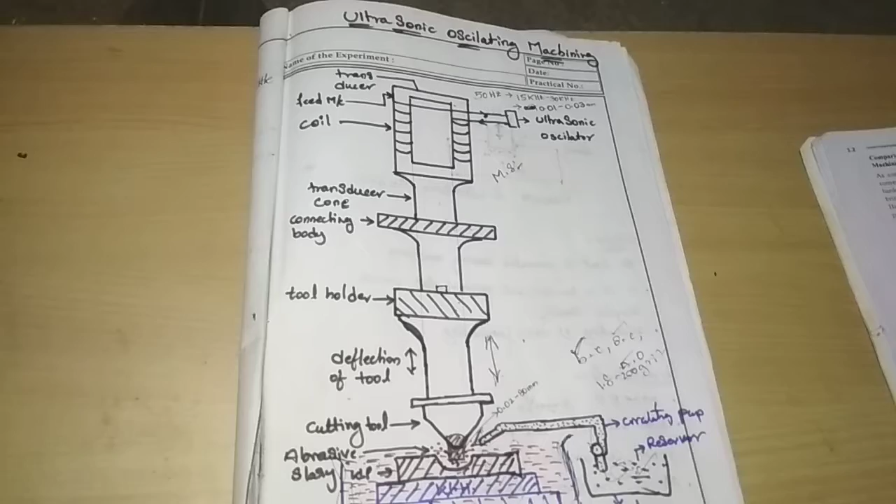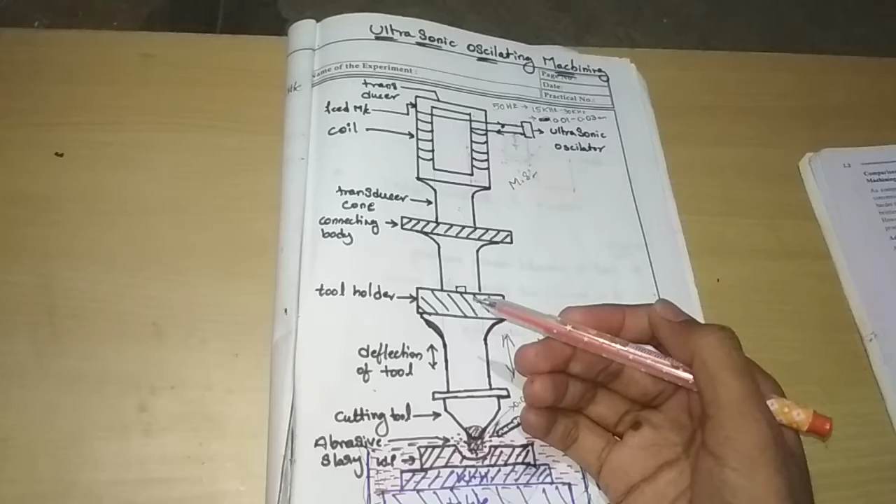Today we are discussing ultrasonic machining. Earlier class we already discussed about abrasive jet machining. So today, ultrasonic machining. This is the basic diagram of ultrasonic machine. We will explain each and every step in detail.

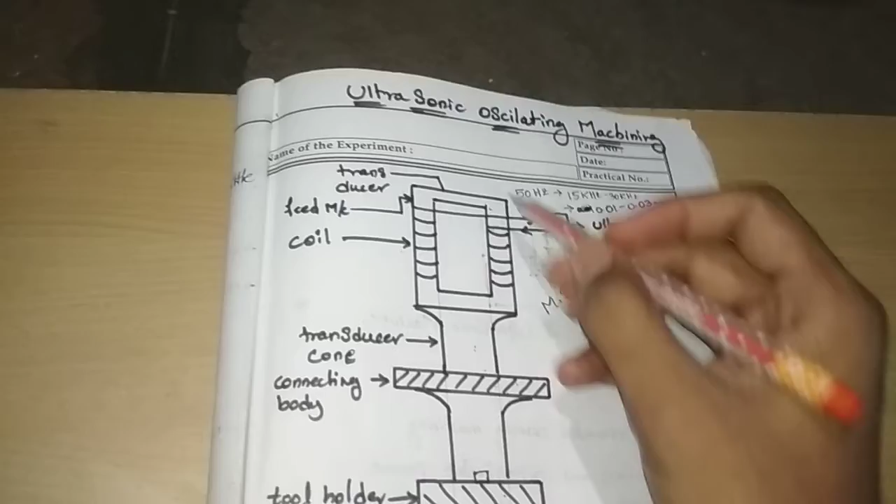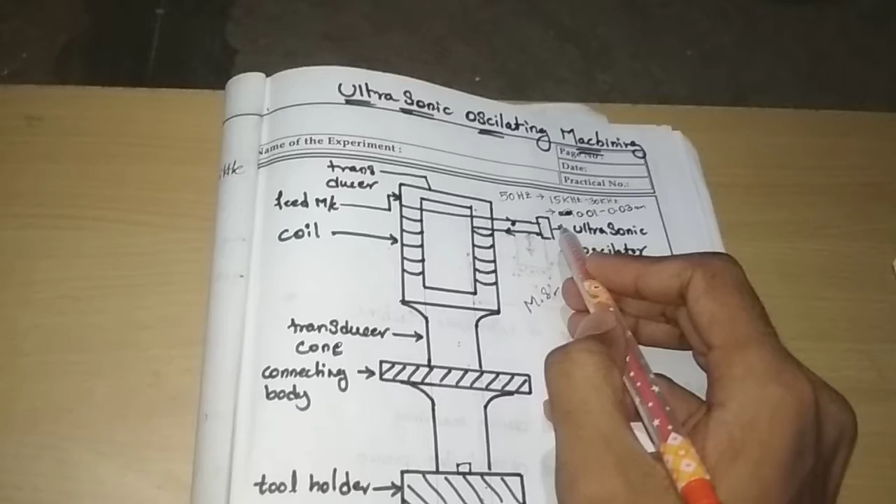Let's start. This is a transducer, this one is coil, this ultrasonic oscillator. So the transducer aims to convert linear vibration at high frequency with minimum amplitude. Low frequency 50 Hz power is converted to 15 kHz to 30 kHz, with minimum amplitude of 0.01 to 0.03 mm.

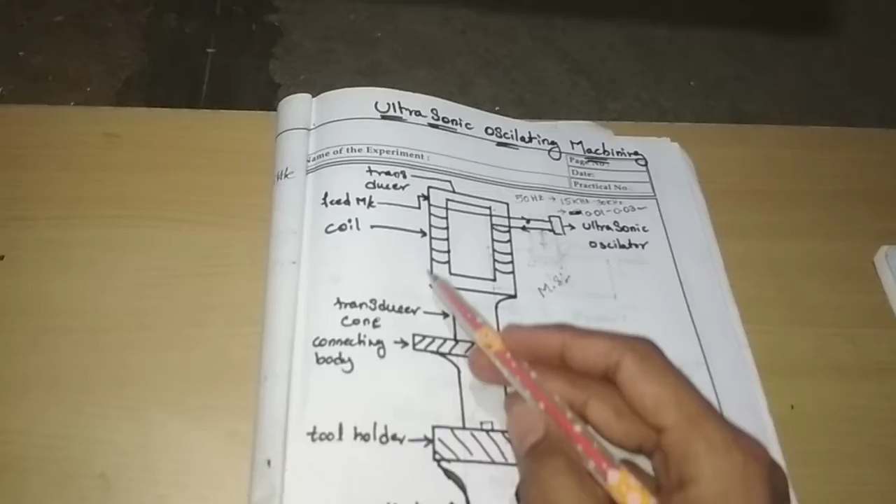This is a transducer cone, connecting body, tool holder and deflection of tool. Deflection of tool means the direction of tool moving, which means to and fro motion, up and down motion. So this is the up and down motion of the tool.

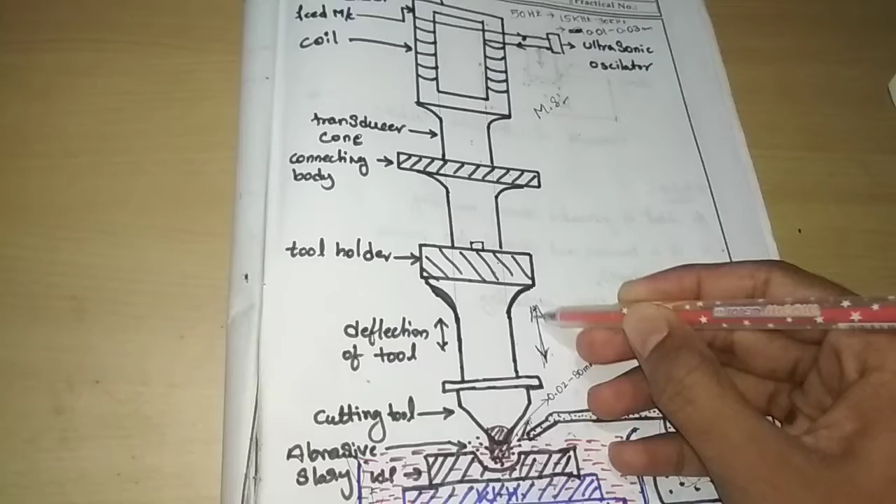This is the working zone: workpiece, work holding and table. This is a slurry containing abrasive particles. What is an abrasive particle?

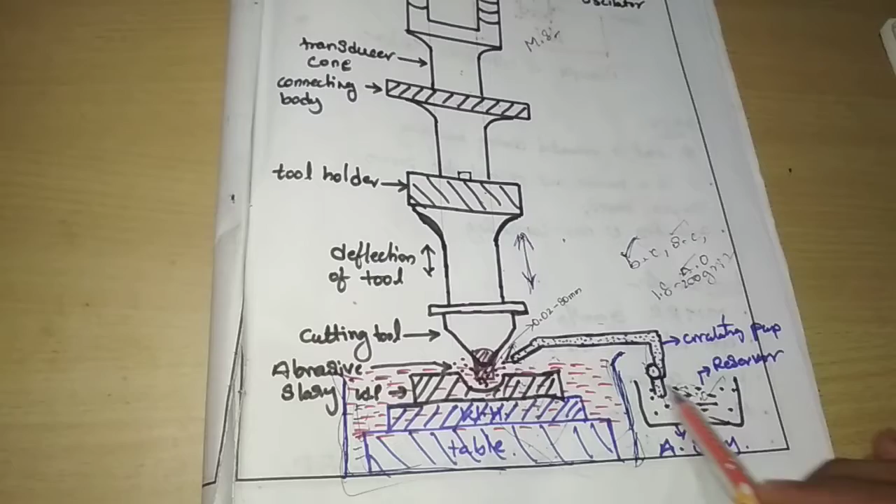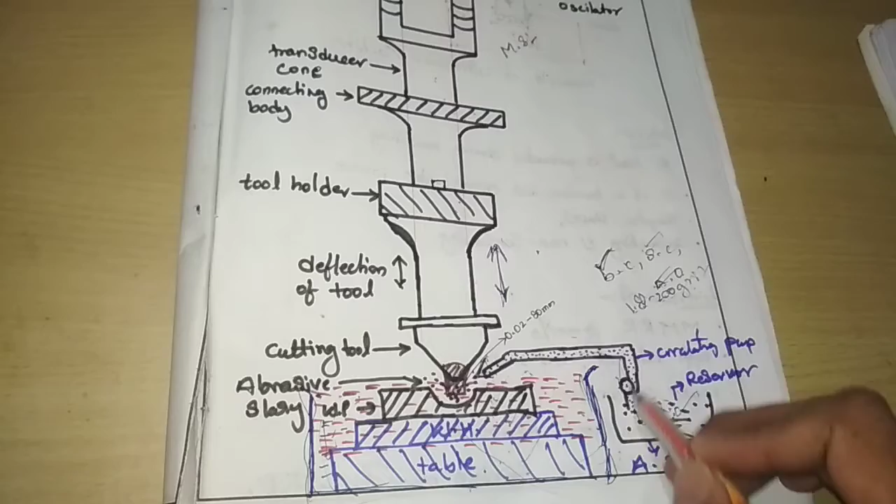Abrasive particle is a tiny particle which is very hard. Generally we use boron carbide, silicon carbide, aluminum oxide. The size of the abrasive particle is 180 grit to 200 grit. This is circulated through the pump. The diameter of the tool is 0.02 to 80 mm.

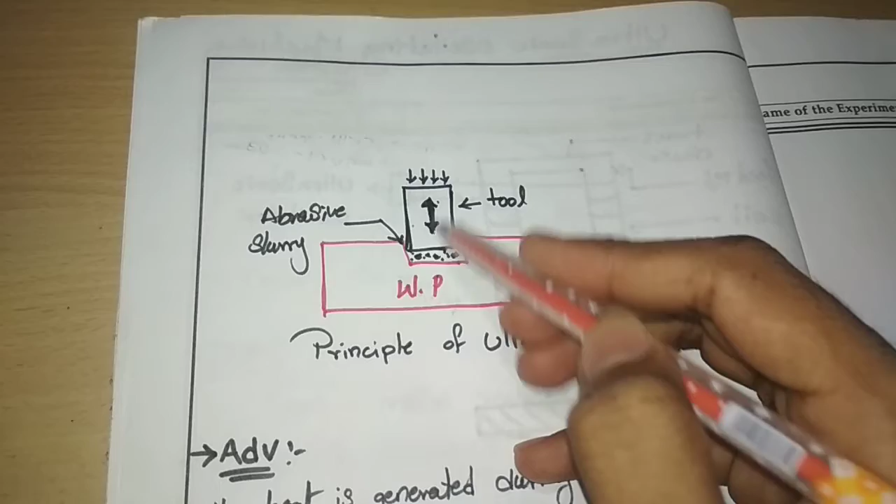The principle of ultrasonic machine, how does it work? This is a workpiece and this is a tool. The tool moves in up and down motion. The transducer generates high frequency with minimum amplitude and it will move up and down.

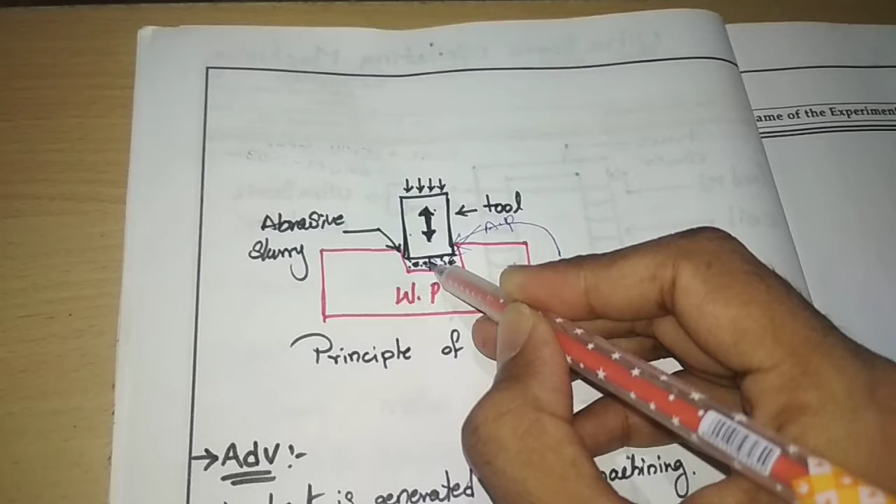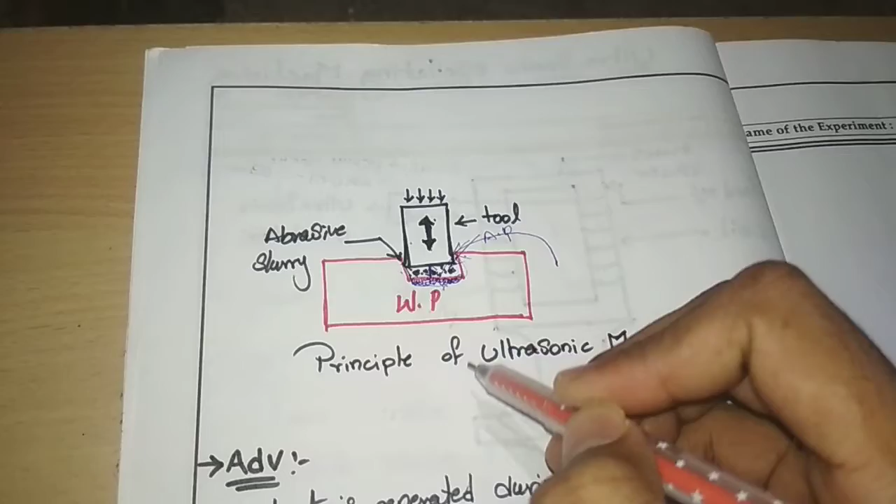So this up and down motion, we have a specific gap between the tool and workpiece. This gap is filled with abrasive particles, which are continuously circulated by the pump. These abrasive particles impinge the workpiece and remove the metal in the form of very tiny particles, very tiny chips. These chips are removed from the workpiece and make a die cavity, like a cavity shape we have formed.

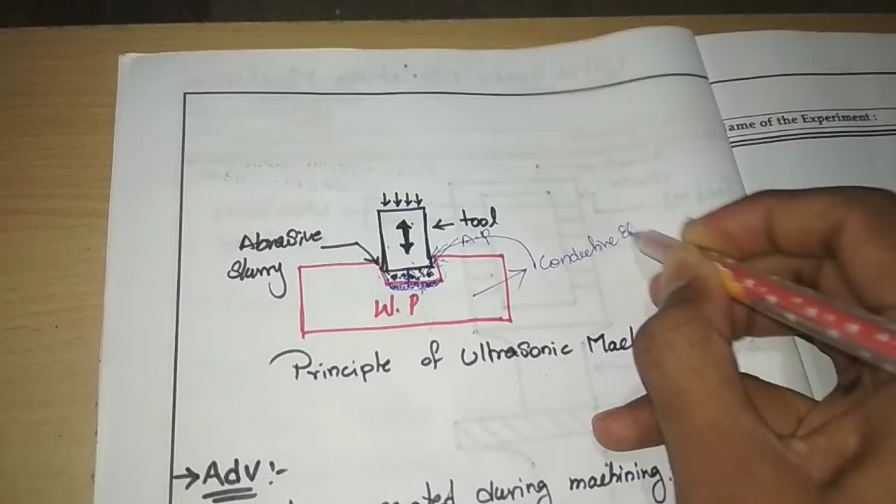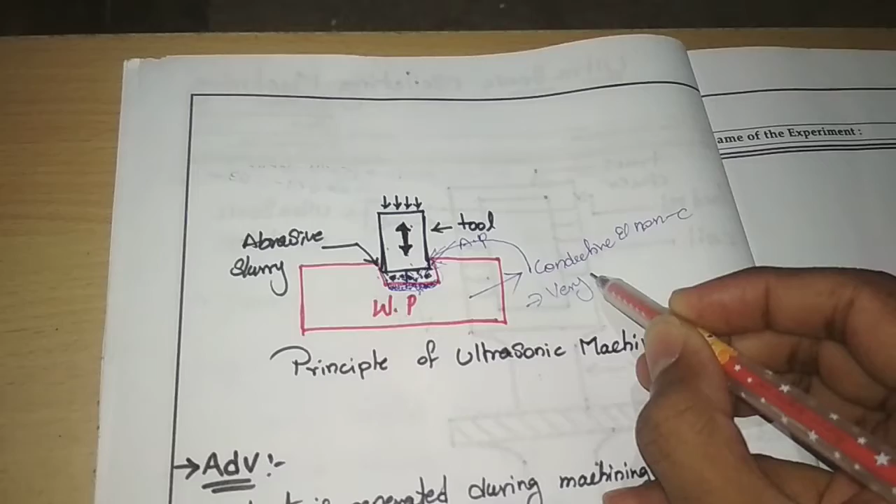So the main aim of the ultrasonic machine is to machine conductive and non-conductive materials, and it can also machine very hard materials. The motion of the tool is always up and down, so it will remove the metal in the form of very tiny particles. This is the procedure.

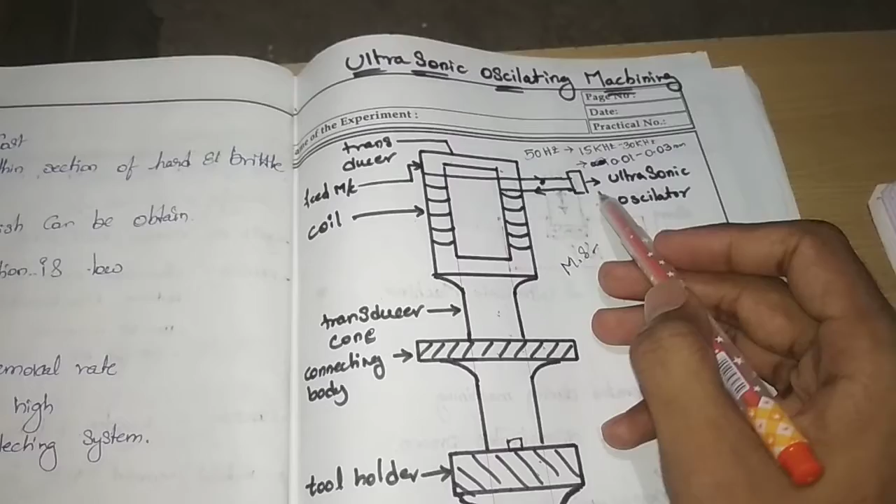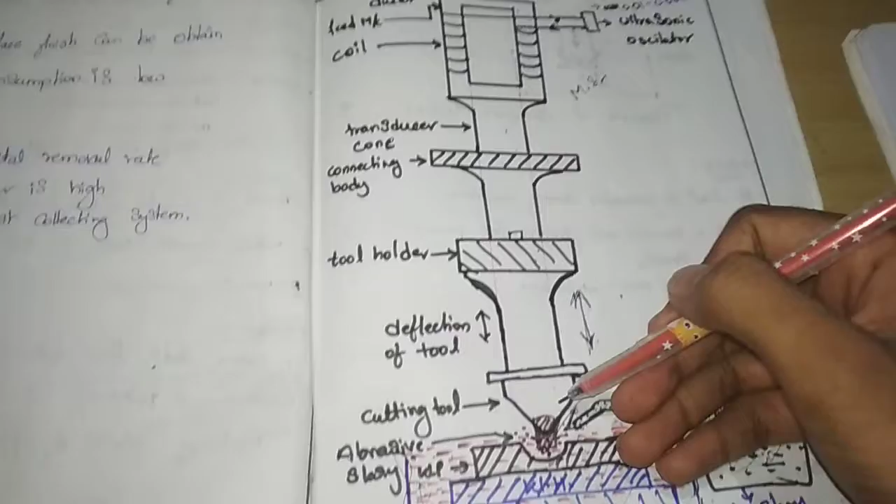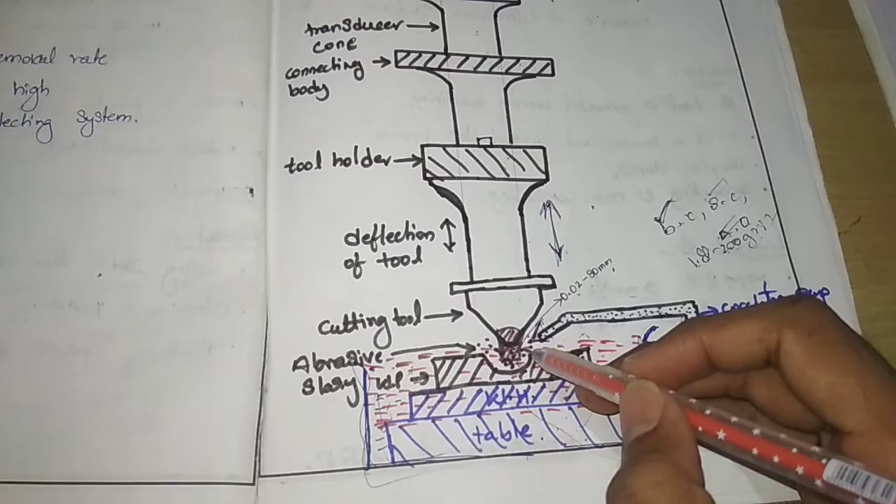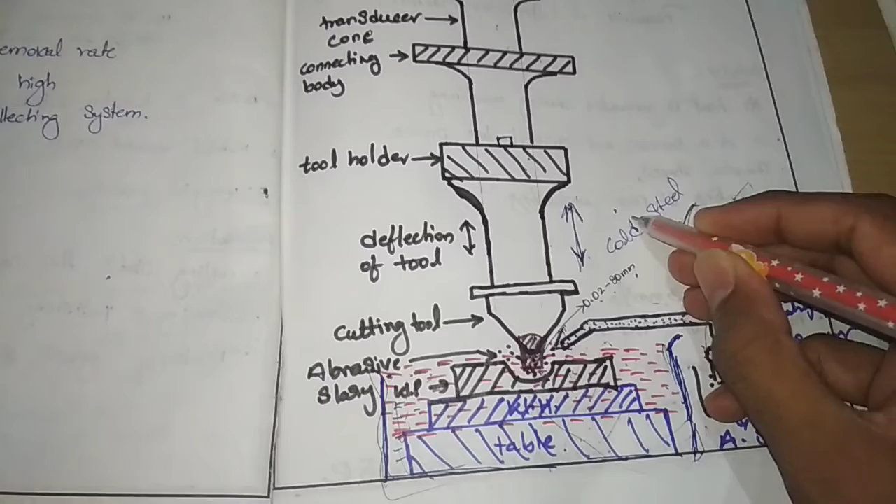So the increasing frequency of the transducer is transmitted to the tool, and the tool has a diameter of 0.02 to 80 mm. This tool is made up of copper, bronze and cold rolled steel. Cold rolled steel we generally use. So this is the main working procedure.

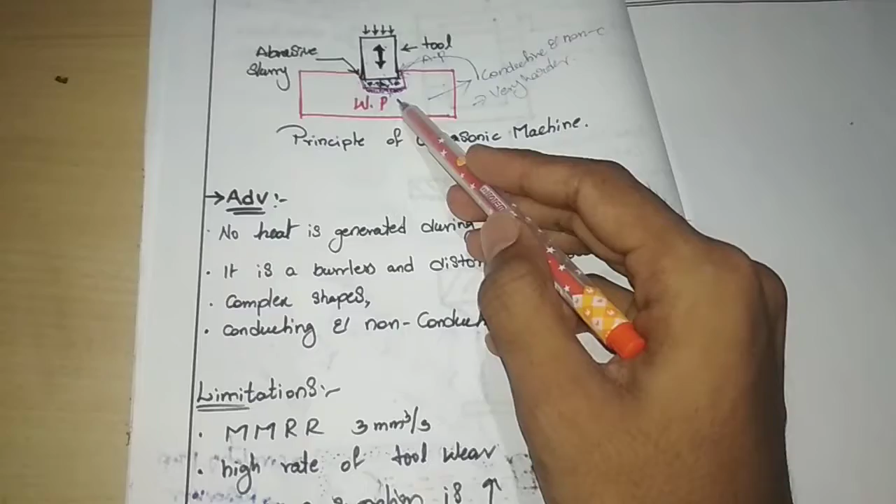Next, advantages: no heat is generated during machining because the abrasive particles act like a coolant, so there is no heat generation. It is also a burrless and distortionless process, since we remove material in microns, so there is no burr.

We can make complex shapes, any irregular shape, and it can be used with conductive and non-conductive materials.

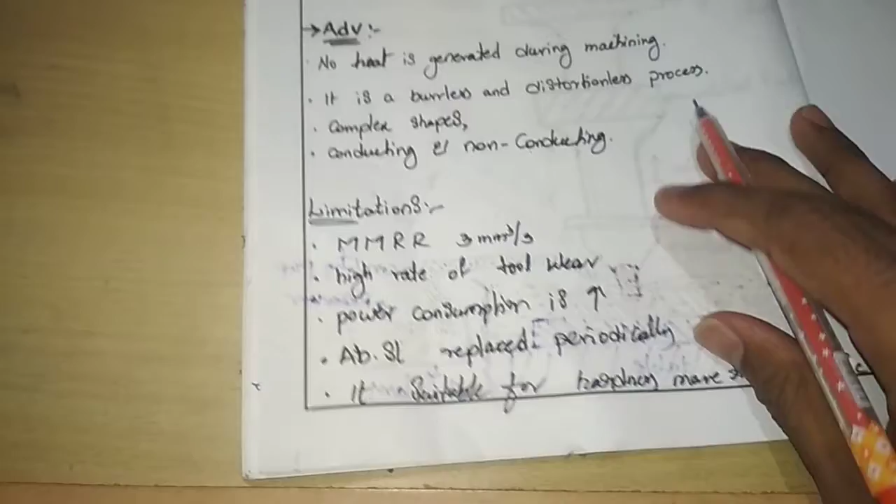We have some limitations also. Material removal rate is very low, about 3 mm cube per second. There is a high rate of tool wear, because abrasive particles randomly remove the workpiece, and they can also wear down the tool. So the tool wears very quickly.

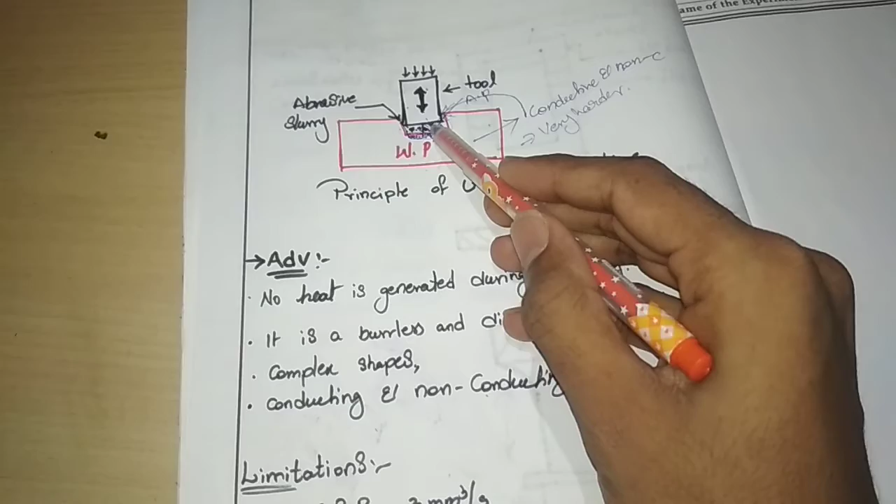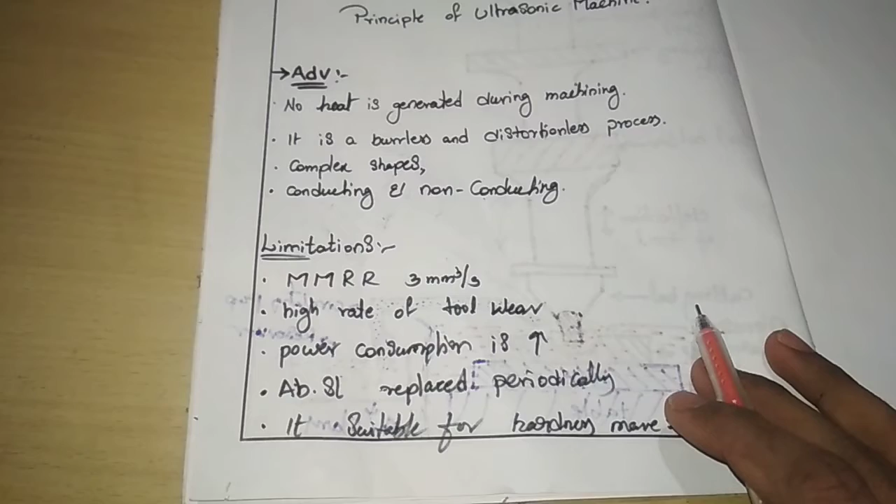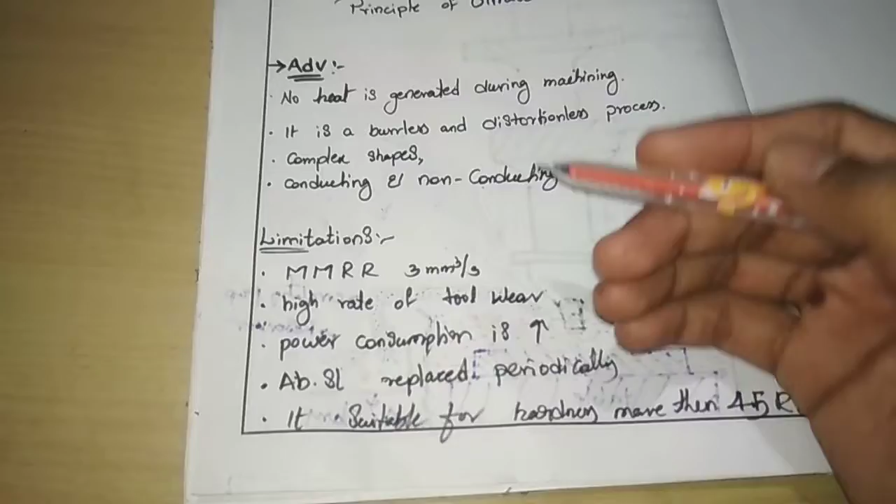Power consumption is very high. Abrasive particles are rapidly replaced periodically, because once used, they get washed out, so washed out particles are replaced by new ones.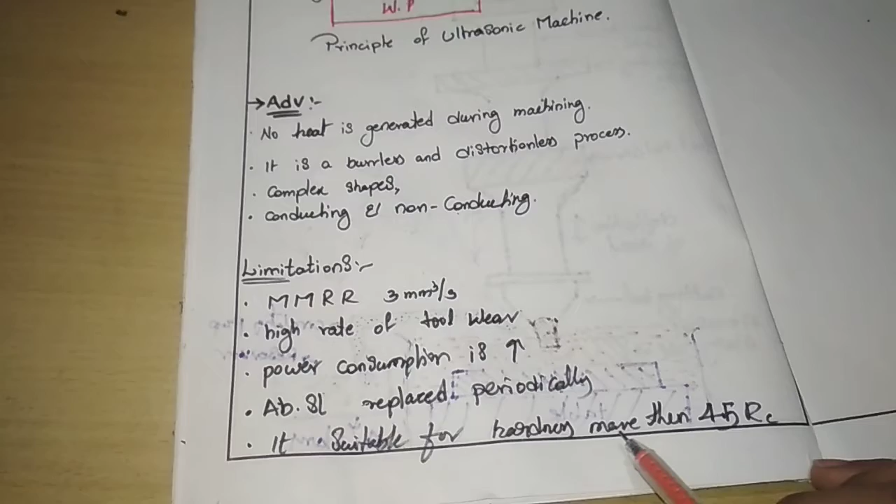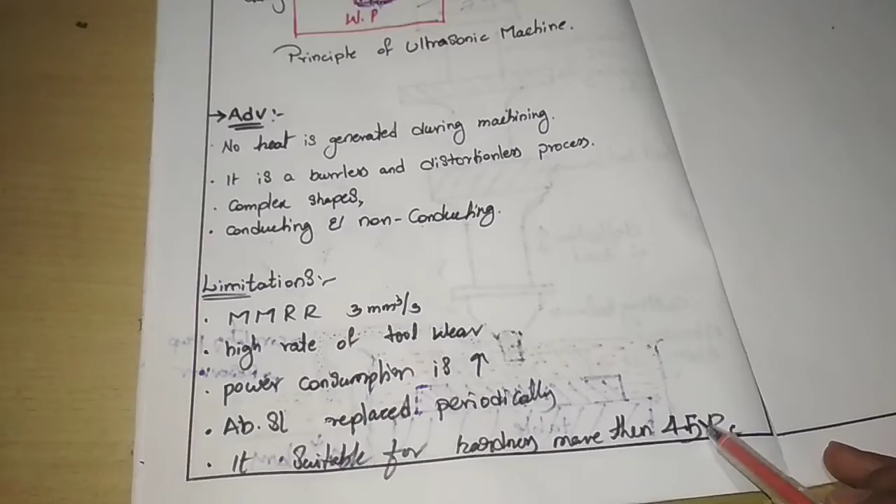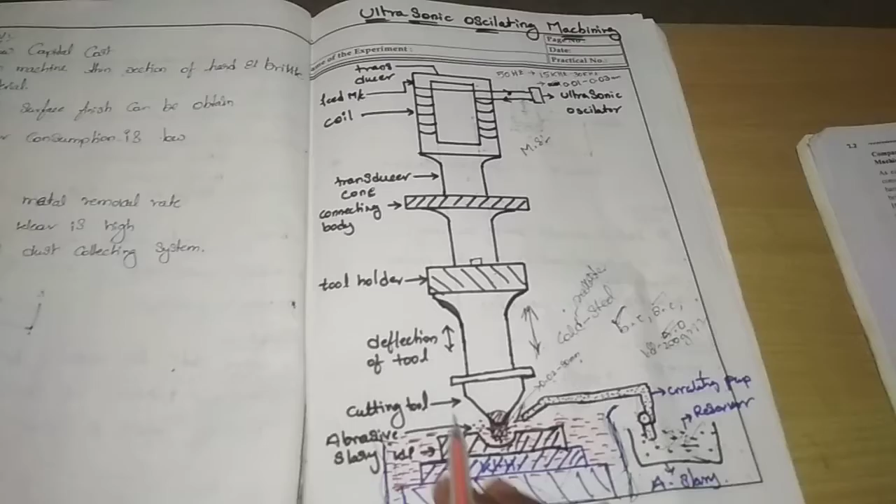It is suitable for hard materials more than 45 RC on the Rockwell hardness scale C, so it can only be used for 45 RC. This is the working procedure, advantages and limitations of the ultrasonic machine. I hope you understand this.